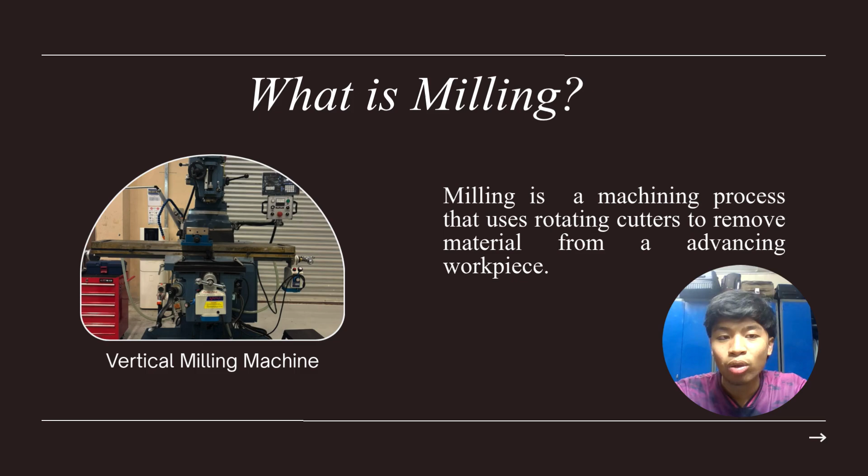The first part is what is milling? Milling is a machine process that removes material from a workpiece using a rotating cutter tool to produce the desired shape, size, and surface finish.

On a milling machine there are four operations. The first operation is facing, which is to reduce the length of the workpiece. The second operation is slot milling, which is to cut a slot into a workpiece using an end mill cutter.

The third step is drilling, which is a process used to create holes in a workpiece. The last part is counterboring, which is a machining operation used to make the hole a little longer and a little larger.

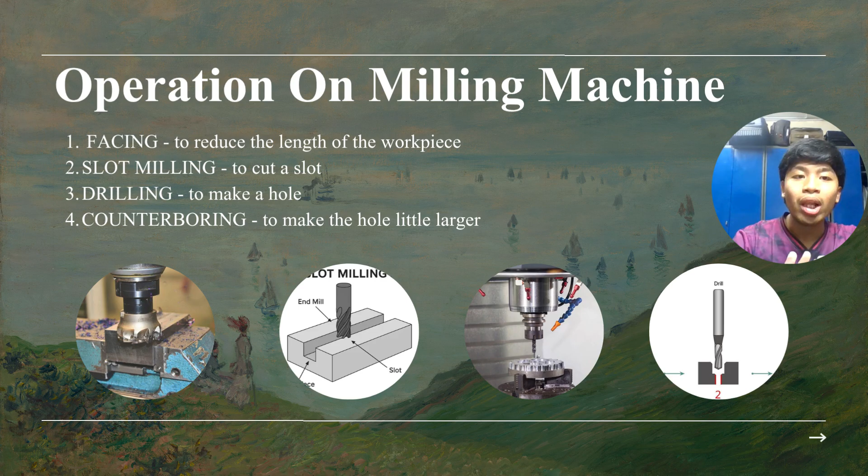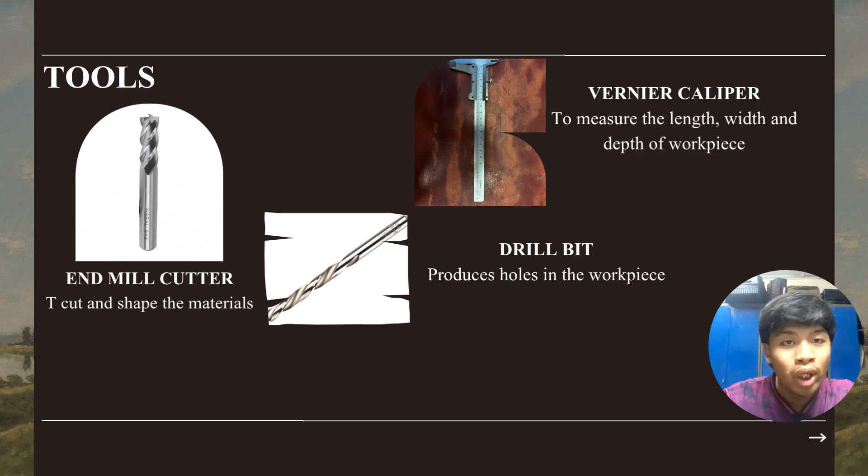These are the tools that we use on the milling machine. We have the end mill cutter, which is to cut and shape the material. We also have the vernier caliper, which is to measure the length, width, and depth of a piece. We also have the drill bit used in the drilling step, which is to produce holes in the workpiece.

On milling operation, we also use the counterbore drill bit, which is to make a hole with a flat bottom and larger diameter on top.

Before we start the drilling process, we use the center drill bit, which is to make the drilling starting point. We also have the C-type wrench spanner, which is to tighten and loosen the collet chuck nut when installing or removing cutting tools.

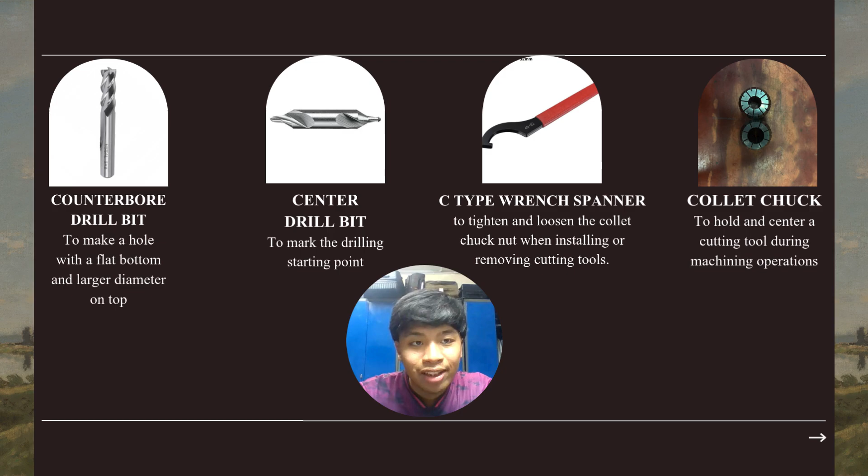We also have the collet chuck, which is to hold and center a cutting tool during the machining operation.

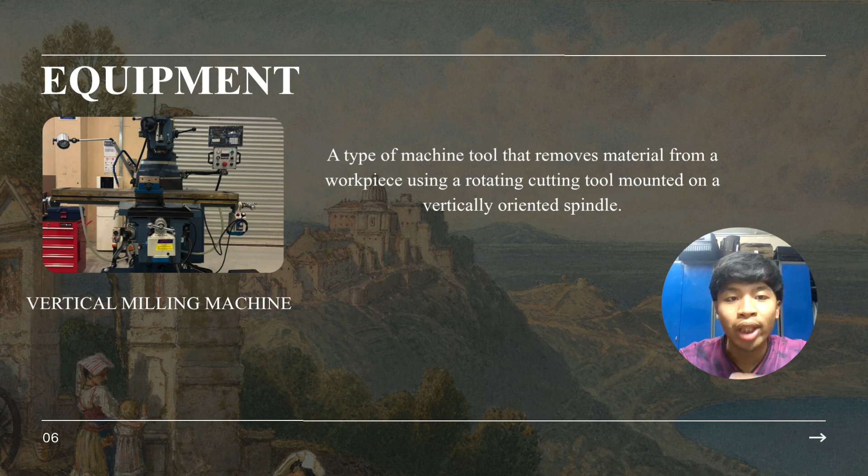This is the vertical milling machine, which is the main machine used in our laboratory operation for facing, slot milling, drilling, and counterboring. It is a type of machine that removes material from the workpiece using a rotating cutting tool to produce the required shape and dimension.

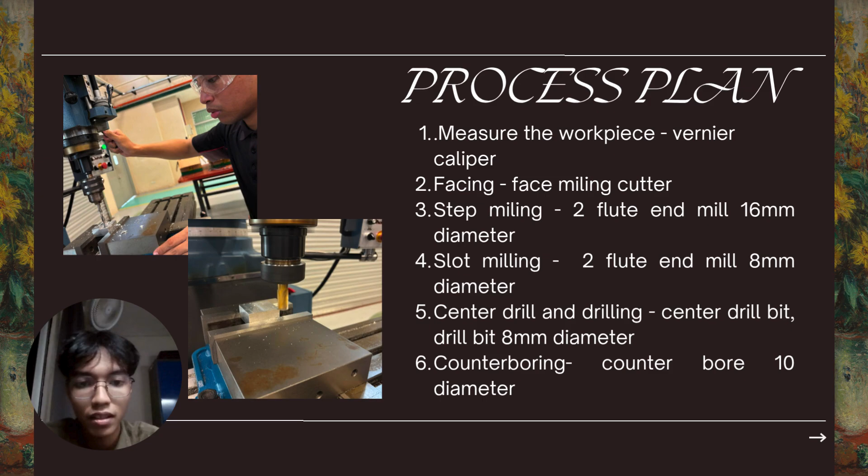The last step is counterboring. We use a 10mm diameter counterbore to enlarge the current hole.

Next, we go to the machine setup. This is where all the process will begin, but we need to make sure that this machine is already set up first before we do any of the process for this lab.

First, make sure the machine switch button was turned on. Second, the lamp was turned on to ensure the process could be observed clearly, though this is totally optional. Third, a suitable fluted end mill was inserted into the collet chuck at half of its body to ensure stable rotation.

Fourth, the end mill cutting tool is slotted into the spindle and tightened with a handle. Next, the speed of the machine was adjusted to 800 rpm. Lastly, the direction of rotation of the spindle was observed before the milling process began.

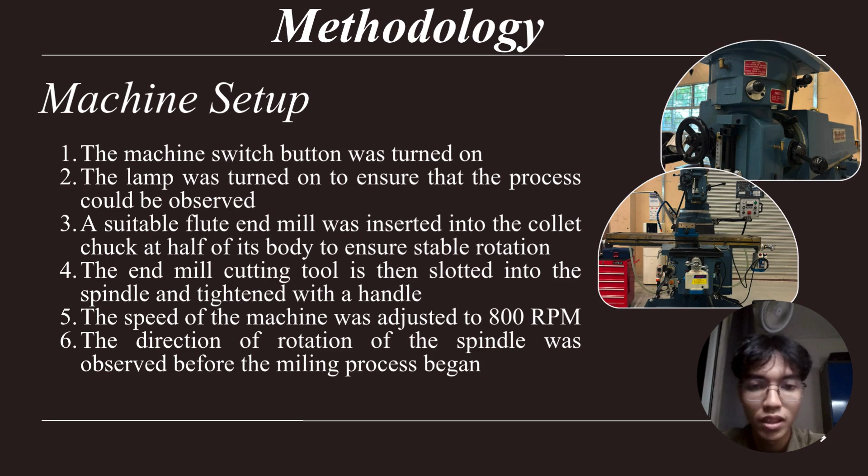This is the first step of the whole lab, which is the facing process. To do it, we must make sure the workpiece was attached to the milling machine table using a clamp to prevent it from slipping.

Then the face milling cutter was mounted on the spindle of the machine. The feed rate and spindle speed were adjusted to 800 rpm to prevent the workpiece from getting damaged. The spindle speed actually depends on how large your workpiece is, so every workpiece has a different spindle speed and feed rate.

The cutting tool must be rotated in a clockwise rotation. Lastly, after the facing process finishes, we must measure the workpiece so we get the desired measurement that we want.

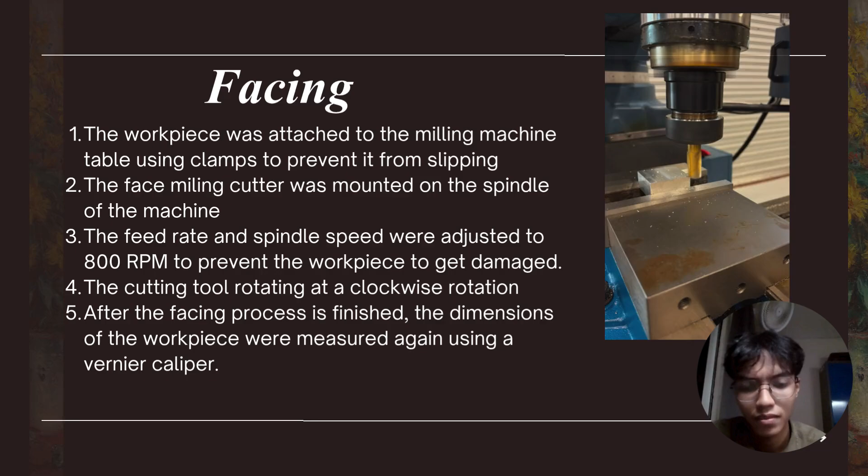Now we have to do step milling, which is a process where we want to remove material and lower the height of the workpiece. First, make sure the workpiece is attached to the milling machine using a clamp to prevent it from slipping. Then we use a two flute end mill 16mm diameter, mounted on the spindle of the machine.

The workpiece was placed perpendicular to the axis of the cutter to ensure the cutting process is right. We must also make sure the cutting tool is rotating clockwise. Then the workpiece was fed into the cutting tool until it reached a specific depth of 4mm. Lastly, we must measure the workpiece using a vernier caliper to get the desired measurement that we want.

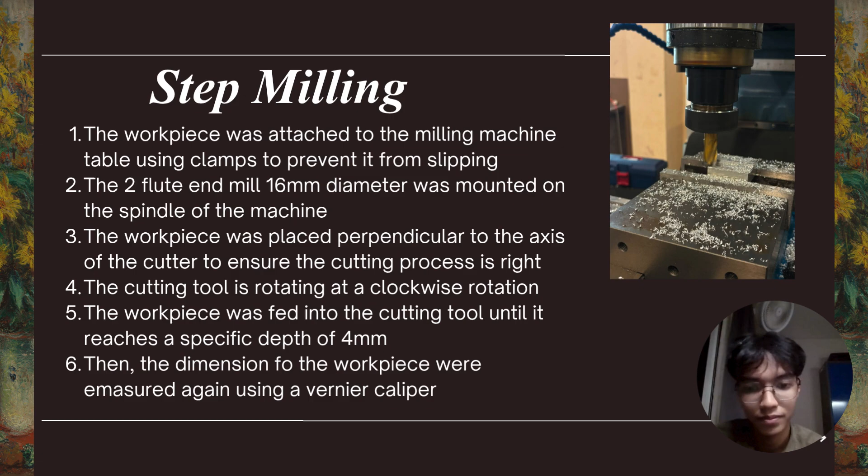After those two processes are finished, we proceed with slot milling. We attach the workpiece to the milling machine table using a clamp to prevent it from slipping. Then a two-flute end mill of 8mm diameter is mounted on the spindle. The cutting tool is adjusted to the starting point of the slot, using the same spindle speed. The milling process begins by turning the cutting tool clockwise until it reaches the specific depth.

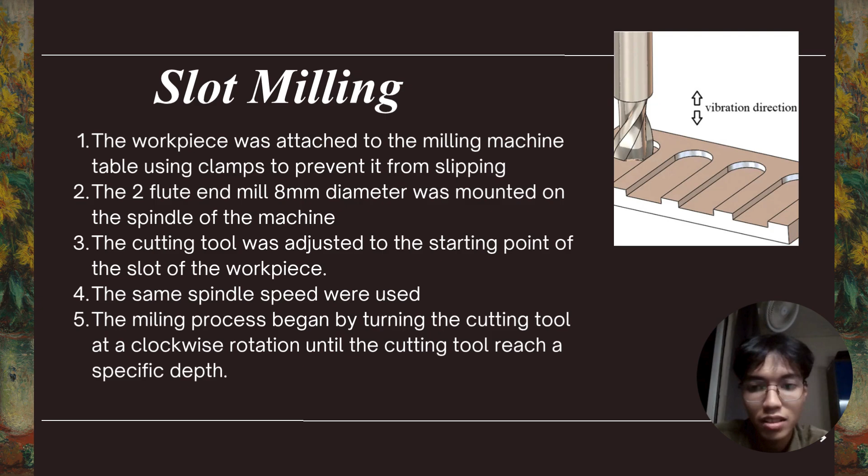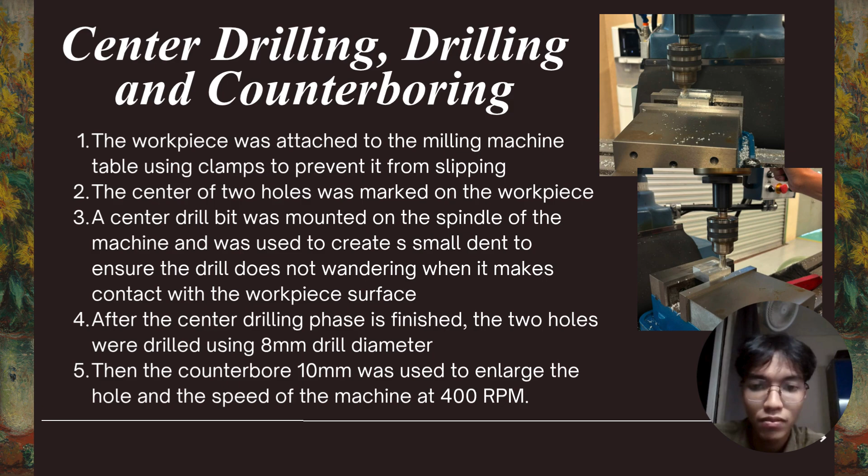Now we come to the last process, which is center drilling and counterboring. We attach the workpiece to the table using a clamp to prevent slipping. This is where center drilling is used. We mark the center of two holes on the workpiece. A center drill is mounted on the spindle and used to create a small dent, ensuring that when we use an actual drill, it does not wander when making contact with the surface. After center drilling, the two holes are drilled using an 8mm drill diameter. Lastly, a 10mm counterbore is used to enlarge the hole, with the machine speed at 400 rpm.

Before we do milling, we have to consider a few precautions. Firstly, make sure the workpiece is secured tightly with the vice. For further validation, tap it with a rubber hammer to make sure it does not move. Secondly, match the correct spindle speed to the material and machine for a better surface finish. Thirdly, verify the cutter rotates in the correct orientation relative to the feed to avoid climb milling, which could cause the workpiece to shift from its original state.

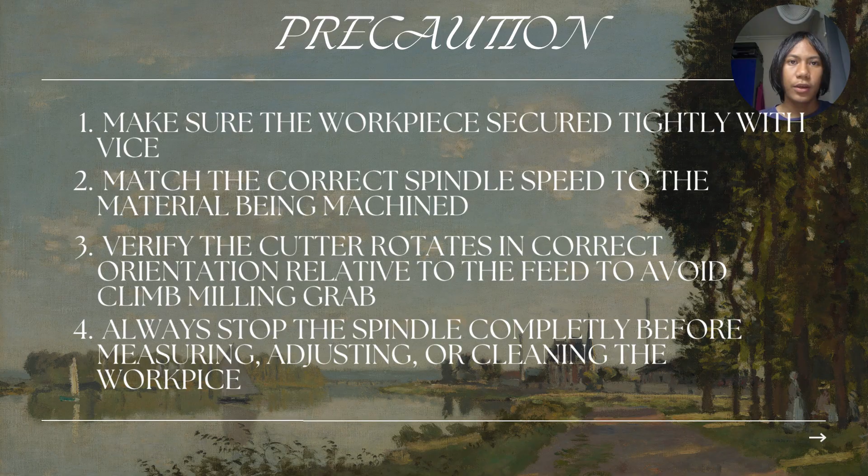Fourthly, we have to always stop the spindle completely before measuring, adjusting, or cleaning the workpiece, to avoid incidents like clothes getting tangled in the machine.

Before we operate the milling machine, we have to follow a few safety rules. Firstly, wear safety glasses. This is mandatory to avoid metal debris and dust going into the eye, causing eye injuries and vision impairment. Secondly, wear safety shoes to protect the foot and ankle from workplace hazards while providing physical stability and comfort.

While handling the machine parts or the workpiece, accidents can happen and the workpiece can fall on our feet and cause injury; this is to prevent that. Lastly, we have to wear a workshop jacket to protect the upper body and arms from mechanical scrapes, hot sparks, and fluid splashes. When operating the machine, we can be exposed to the cutting head and can easily get scraped by it.

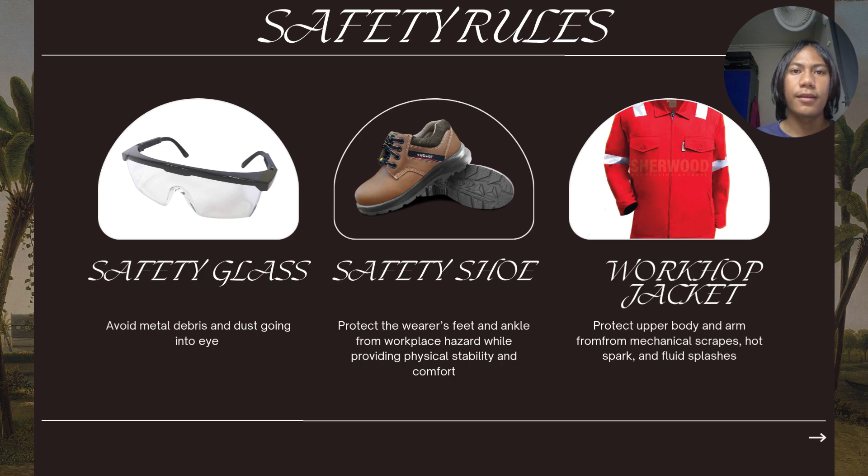MA25059. This slide presents the finished workpiece after all machining operations were completed. The top view shows the slot machined on the upper surface, while the front and side views clearly illustrate the stepped profile and overall geometry of the component.

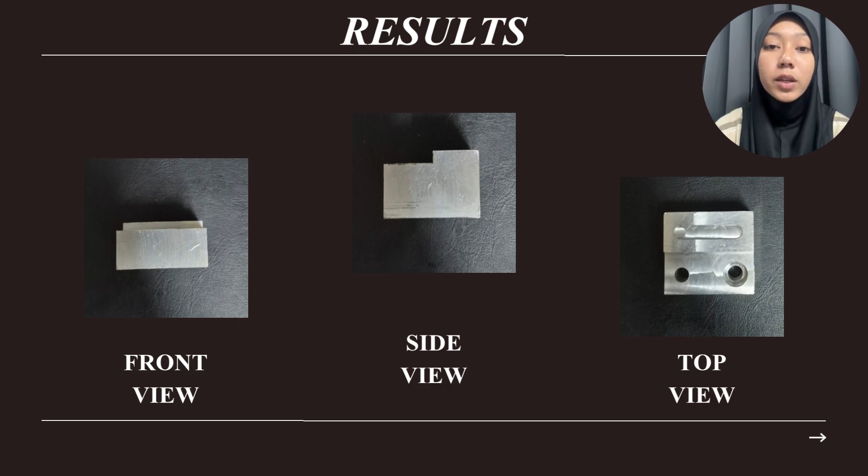The required features, including the slot, drilling holes, and counterbore, were successfully produced according to the engineering drawing. Overall, the workpiece achieved the intended shape and dimensions, demonstrating successful application of face milling, step milling, slotting, drilling, and counterboring operations. However, minor surface scratches and tool marks can still be observed on some machined surfaces, indicating areas for improvement in surface finish quality.

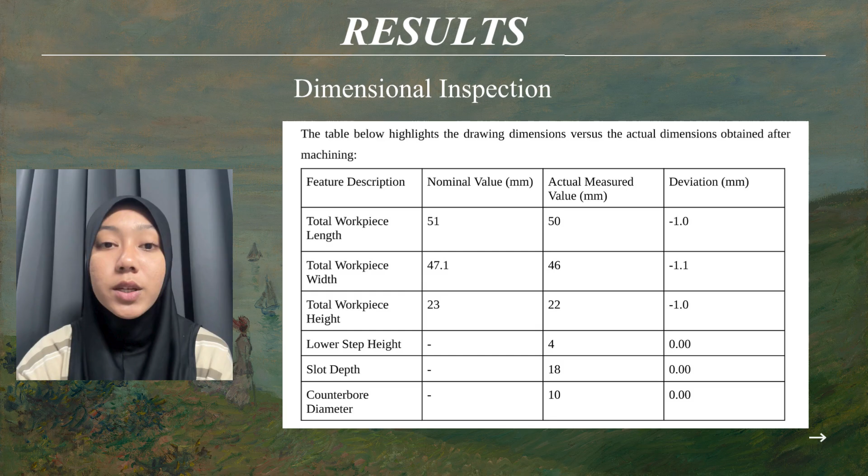After machining was completed, dimensional inspection was carried out using vernier calipers. The measured dimensions were compared with those specified in the engineering drawing. The results show small deviations in the overall length, width, and height of the workpiece. However, important features such as step height, slot depth, and counterbore diameter met the required dimensions. Overall, the machining process was successful and produced a workpiece that closely matched the design specification.

During the machining process, several problems were encountered, including scratches on the workpiece surface, burr formation at the edges, and slight dimensional errors. These issues were mainly caused by the presence of aluminum chips during milling, tool misalignment, excessive material removal during the finishing process, and measurement mistakes during setup.

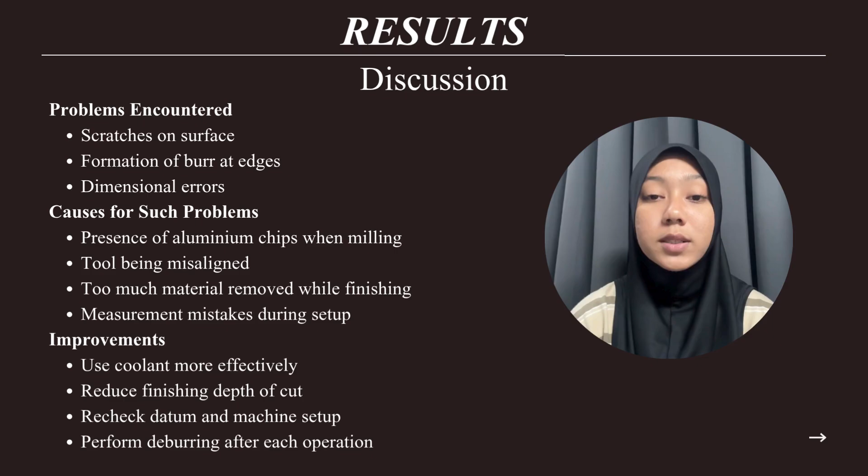To overcome these problems, coolant should be used more effectively to remove chips and reduce heat generation. In addition, the finishing depth of cut should be reduced. The datum and machine should be rechecked before machining, and deburring should be performed after each operation to improve the surface finish and dimensional accuracy of the workpiece.